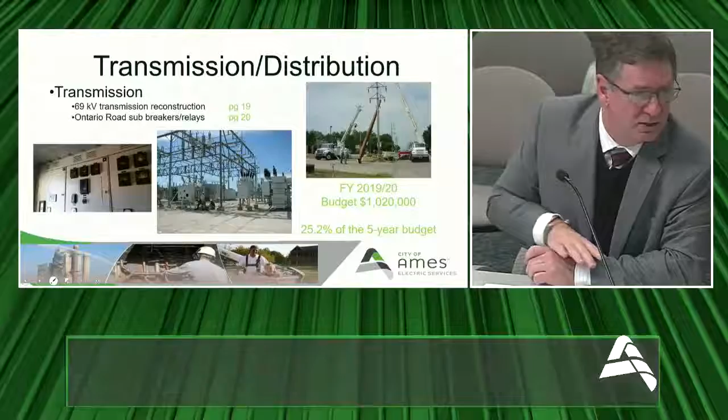The numbers on the lower right show that in fiscal year 2019-2020, from a transmission and distribution standpoint, we're only spending about $1 million. But looking at the overall 5-year budget, it looks like we're spending about 25% of our capital budget on transmission and distribution, which means the remaining 75% is going to be spent on the power plant.

From a power plant standpoint, we basically have 4 units. We have 2 peaking units, called gas turbines or combustion turbines. Combustion turbine 1 is our older unit, put in in the 60s. The communication equipment between the main power plant and that unit is fairly outdated, so we have a project to basically replace the remote terminal unit, the meters, and the relaying and things like that.

Before we get to power plant, the other half of the transmission side is we do have projects where we're continuing as a capital project to replace LED streetlights. This is a 5-year project, and we still have a few more years to go. By the end of this year, we'll be at about 55% changed out.

The approach we took, rather than spend a lot of money in year 1 and bring in crews to change everything out, is that anytime we touch a light, whether changing out a pole, the light bulb itself, or the masthead or anything, we automatically put up an LED. That way we're maximizing the use of our maintenance time, but it's taking us longer to get changed out. Once the CIP is done, all future LED changeouts and installations will be done under our operation and maintenance. We should be concluded by the 21-22 timeframe.

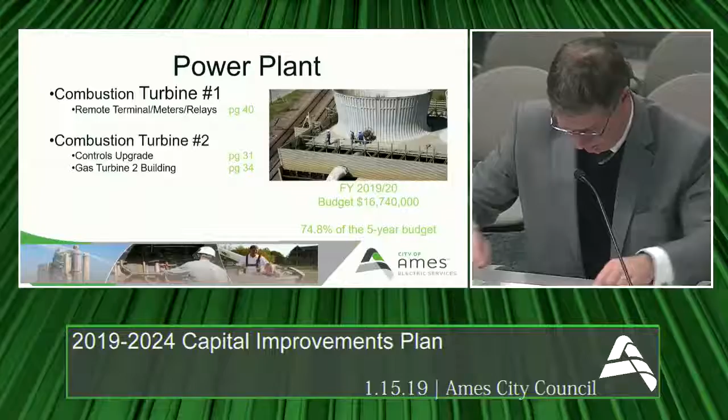Question, Don. On the combustion turbines, how often are those used in a typical year? Typically we will run a combustion turbine for two reasons. One, for price — these things cost about $250 a megawatt hour to run, compared to our unit down on Main Street, which is about $38 to run. We haven't been seeing prices that would drive that. The second reason we would run it is for reliability. If we had a power line go down or anything like that, these units would be the things that come on, and they start very, very quickly, so we have reliable power to our customers and could have them online in under a half hour.

So I understand that's why they're there, but in practice, how often have they been used? Under 100 hours a year. Thank you. And Steve was mentioning to me that they're also used at time of peak. Again, that's a price thing, but when we're typically peaking, which is in the summer season, there are times when we would like to have generation online here. Again, from a reliability standpoint, we're not importing stuff, we have the capability to cover all of our loads here if we want to.

One of our two baseload units, Unit 7, we have several projects going on there, and many of these have been in past CIPs. We've delayed some by a year or two because our primary need for both units is boiler tube work. Mr. Schainker mentioned in his budget highlights how we've shifted things that were less critical than boiler tubes, and this is one of those projects we delayed a year so we can spend our resources on boiler tubes.

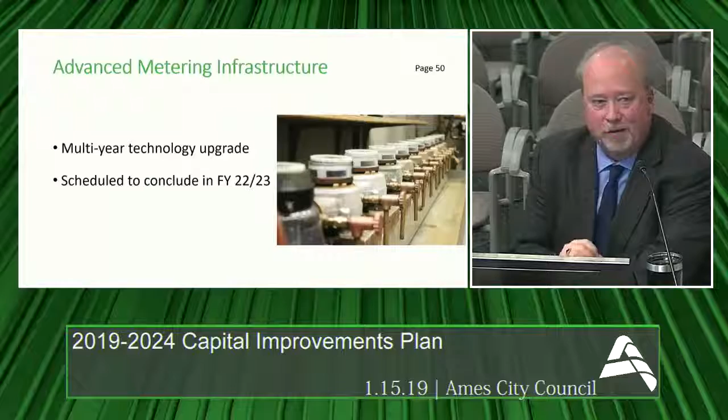Page 51 is a collection of smaller projects that don't warrant their own standalone page. We call it a facility improvements project. In the first year, there is money set aside for plant control, the SCADA systems, and the plant security systems, in anticipation that after living there for 2 years we'd find a couple things that needed to be tweaked in how those systems operated.

We're also including money for a distributed antenna system that will go into the facility to transmit cell phone signals and public safety radio capacity down into the interior of the facility, for employee safety, emergency response safety, and so maintenance staff working in the basement can get a phone signal out to contact a vendor if needed.

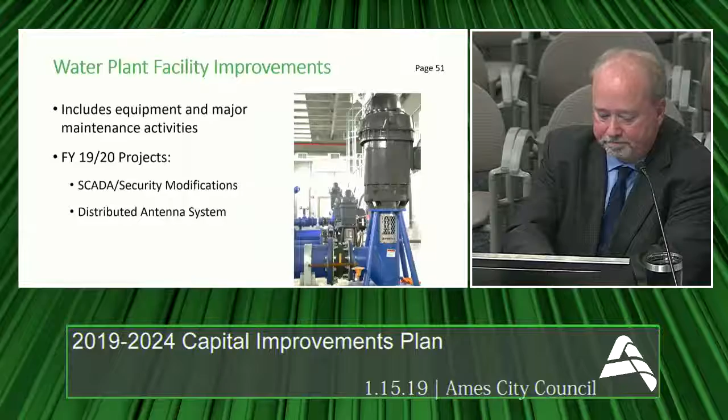Page 52 is the demolition of the old water treatment plant. We are going to remove the treatment structures there, not the 2-story technical services complex, which is home to the water meter division and laboratory services division. That building is going to remain. The one change from what you saw last year is we now show the expenses split over 2 years, anticipating the work won't all occur in one fiscal year.

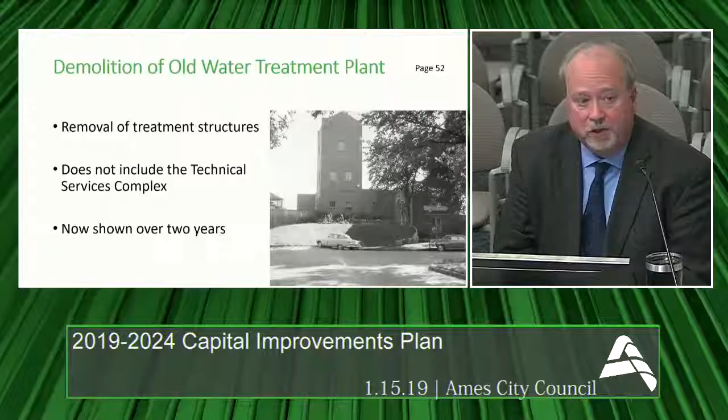What will you do with the space when those are removed? Our intent for now is just to return it to green space. There's no immediate plans for the site. We made a commitment to the neighbors early on that we weren't going to let the site just sit there and deteriorate and become an eyesore and a hazard. We want to get it taken down as quickly as we can.

For the building that's going to remain after demolition, is there anything special about its construction, or is it just a perfectly good building we might as well use? Yeah, it's about 25 years old and still in really good shape. There was just no reason to spend the money to move or replace that facility. I like this picture, it's about a 1950s vintage shot of it. Yeah, that's from when Fifth Street still went past the facility there.

Do your construction costs include any modifications to the structure that remains, in terms of exterior wall construction modifications, that kind of parking stuff? Yeah, it also includes some active utility piping that still goes through the old facility that we'll have to make some adjustments to as well.

Page 53 is a wellhead rehabilitation project. You saw this last year. The difference is we're adding another 50,000 in the first year of the CIP so we can do some antenna replacements. We've had some issues with intermittent communication failures, and working with some specialized vendors, it seems like now's the time, while we're doing controls work on the wells, that we should go ahead and update the antennas as well. So we've added a little money in the first year to do that.

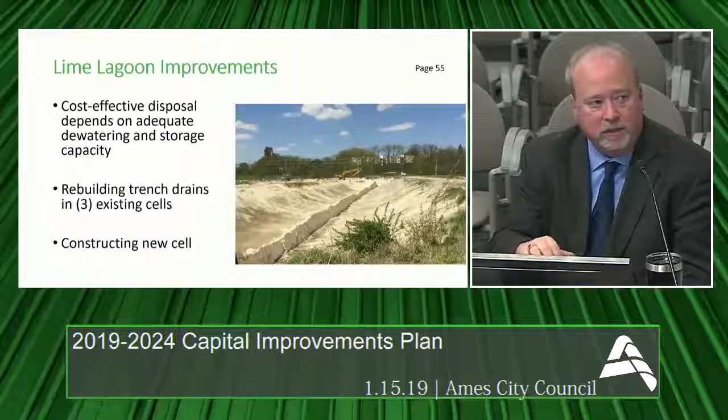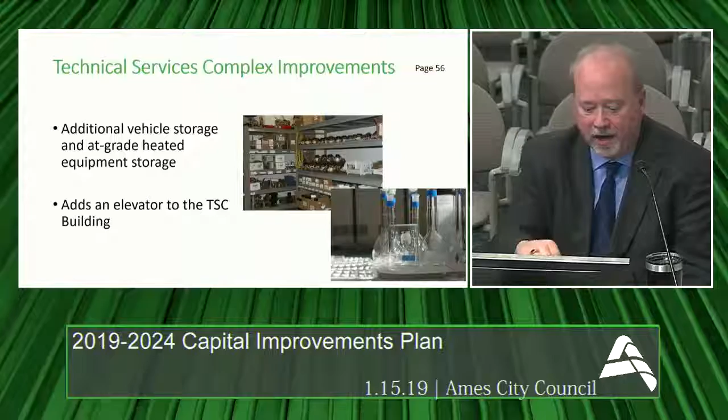Page 56 is some improvements to the technical services complex, that two-story building. Once the water plant comes down in the space immediately adjacent to the TSC, we're looking to add some vehicle storage, some at-grade heated storage for the laboratory division, and also adding an elevator onto that building. As long as the water plant's there, there was a ramp you could drive up to get to the second floor. That option will go away as the plant comes down.

Page 57 will be an extension of the plant control system out into the distribution system. It'll give us a better, more in-depth look at what's actually happening in real time in the distribution system. It'll allow us to track some limited water quality parameters. The big thing is really going to be tracking pressure, that's one of the main things we're wanting to get.

Systems are becoming intelligent enough that now if a main break happens and there's a pressure wave that goes out in the distribution system, by triangulating between multiple sensors, it can help us narrow into where the main break was. That'll hopefully allow us to get earlier notification, quicker responses out. And if a boil water advisory is needed because of a main break, it gives us the data to delineate exactly where that area is, so that everybody who needs to be advised is, and people who don't need that disruption don't unnecessarily get included in the boil water advisory.

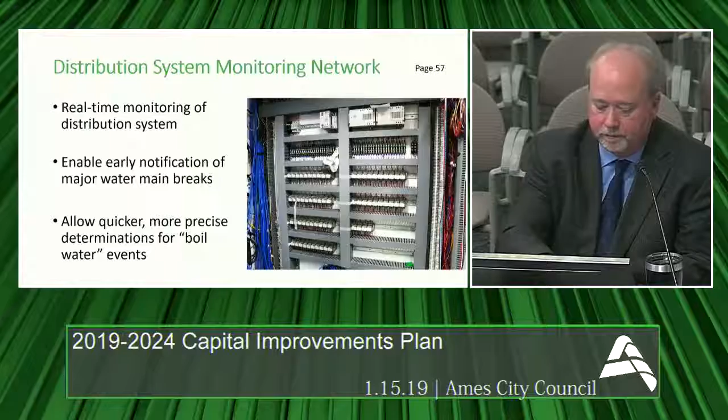Page 58 is some placeholder money for an elevated tank in the East Industrial Park. We know that at some point we are going to need a tank there to manage pressures and provide fire flows. The timing, however, is what we don't know. It's really going to depend on the type of development and where it happens first. If it happens more on the west side, closer to existing infrastructure, we may not need an elevated tank. But if we get an industry way out on the east edge, particularly one with firefighting concerns, then we'll probably have to move quicker.

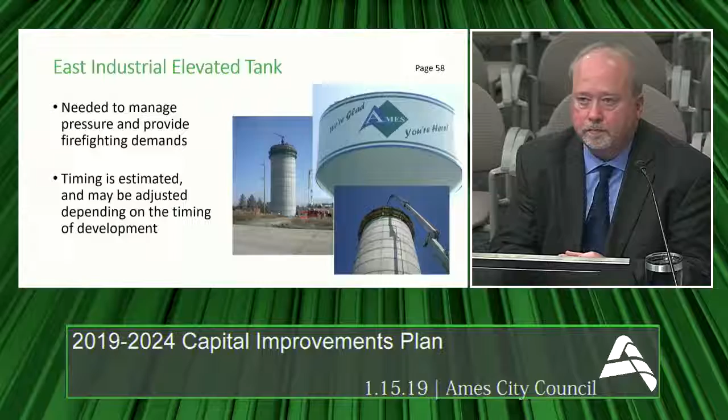So we've talked before about the types of industries that might locate out there and the amount of water they would use and how that would affect plant capacity.

This is long down the road, but is there any chance we'd have even more expansion out there that would require a 1.5 million gallon tank or 2 million gallon, just thinking that sometimes the base cost is about the same, you just get a bigger tank. How do you arrive at the 1 million gallon tank to come up with what's best to serve that area and provide for the needs?

A 1 million gallon tank is really kind of an industry standard, and it's based really on the fire flow volume more than the water demand by the industry itself. So that's really what would drive it. Now, if we were to have an industry with some sort of exceptional firefighting demand, that may cause us to rethink it. But when you get to larger tanks, you start getting issues being able to turn the water volume over to keep a chlorine residual in the water. So there's a line we try to walk there as well.

What's interesting is that the size of the tank doesn't really matter — it's really the pressure in the water lines versus the capacity versus drawing the water out of the tank, is that correct? Right. The elevation of the water is what drives the pressure, not how much water is up there. Whether it's 1 million gallons or 2 million gallons, it's the elevation of the water that's going to drive the pressure.

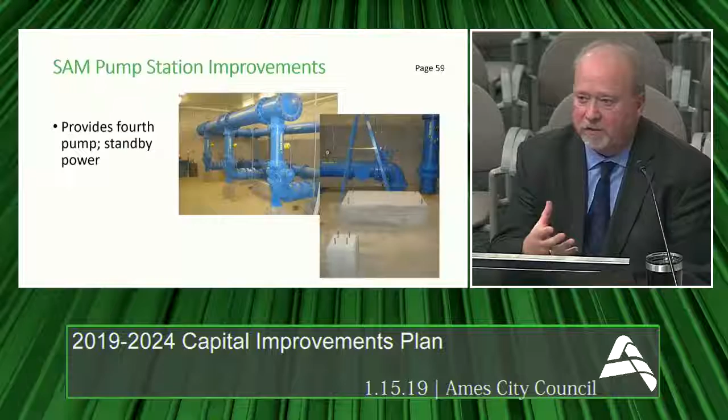Page 59 is some improvements to the pump station located at State and Mortensen, right at the base of that water tower. When that tank was constructed, it was built to accommodate 4 pumps, but only 3 were initially installed because there wasn't enough demand in that west pressure zone. As we track the growth in hours per day or week that we have pumps doubled up in that pump station, it looks like it's time to start planning to add the 4th pump that was ultimately envisioned to go there.

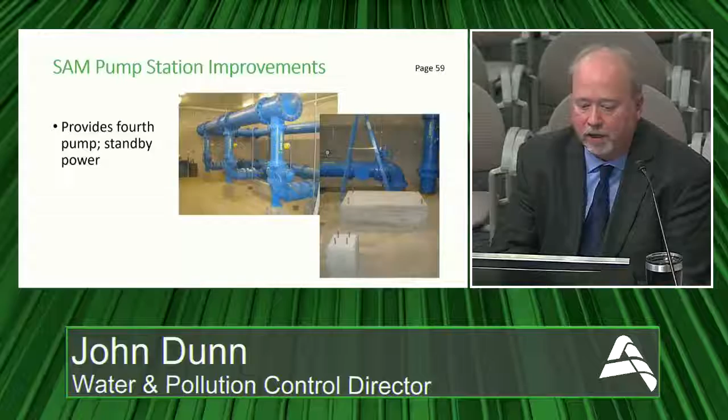And that's it for the drinking water side. So I'll keep moving straight ahead into the water pollution control facility. The first project there is on page 61. Again, this is kind of an assortment of smaller projects. You can see, for example, a grit bin in the first year, and also the construction of a new sampling station at the raw water pump station, which is what we have envisioned for the first year of the project.

Page 62 is what's going to become a multi-year renovation of the raw water pump station process equipment. Most of what's in this facility is still original. It's 29 plus years old now, and we're starting to see that it's really showing its age. So we are proposing a multi-year project to completely renovate it, so that the money is spread over a couple of years. You don't see it all in this 5 years because there's another year, essentially year 6, where construction of these modifications would complete.

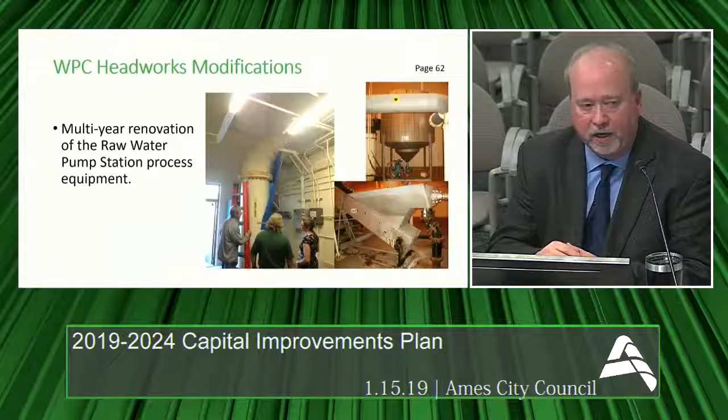Page 63 is our new project, the watershed-based nutrient reduction project. You might recall we talked about this in November when we were here in a workshop format. At that time, we had proposed $100,000 per year. Based on feedback we received from you, and also public comments suggesting that maybe more money should be dedicated to this purpose, we've now increased that to $200,000 per year. This would look at projects outside the water pollution control facility in the watershed, looking for projects that have a nutrient reduction function, but that also provide other ancillary benefits. Maybe it's providing recreational opportunities, maybe it's flood control, maybe it's drinking water source protection. But we're looking for opportunities where we can get as many of those other benefits in addition to nutrients, so that we maximize the bang for the buck.

We also hope that for a lot of the types of projects we would go after, there might be some grant eligibility, so that we can use our money as a local match and leverage that to get even bigger, more beneficial projects to come out of it.

Would those projects be limited to Story County, or how would you go about determining the location of those?

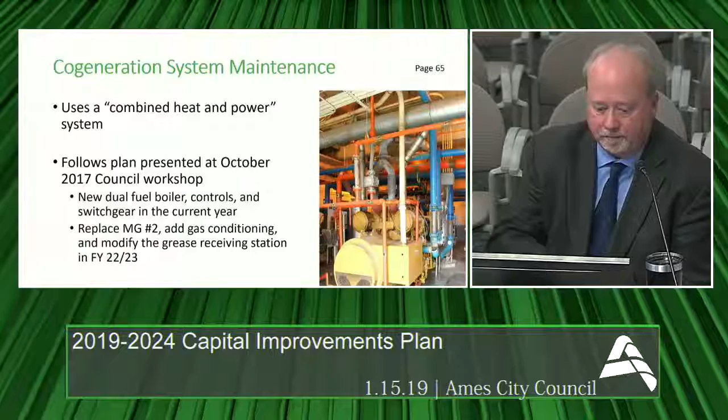Page 66 is the nutrient reduction modifications inside the treatment facility. The goal, as we explained back in November, is to try to meet the goals of the Iowa Nutrient Reduction Strategy over the course of 20 years, making modifications to the facility in 3 discrete phases spread over that time. That plan lets us maximize the remaining useful life of the infrastructure we've got while still continuing to make progress towards meeting those goals.

One of the other pluses that came out of this concept from our consultants at HDR is that by going at this in smaller discrete phases, it gives us a unique opportunity over the next 20 years to address capacity issues at the facility in smaller bites. Every time we do another phase, we can adjust the capacity as needed, so we don't have to sit here today and try to guess what the demand is going to be 20 years from now, or guess what's going to come in the East Industrial Park. We get a chance to take little bites at it, which is really a pretty unique thing for a facility like this to have that option.

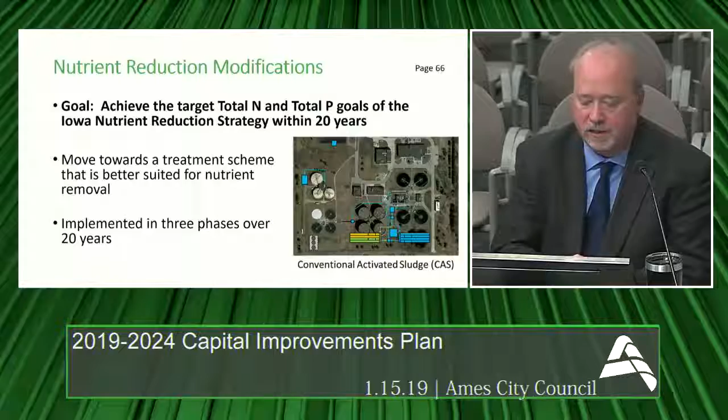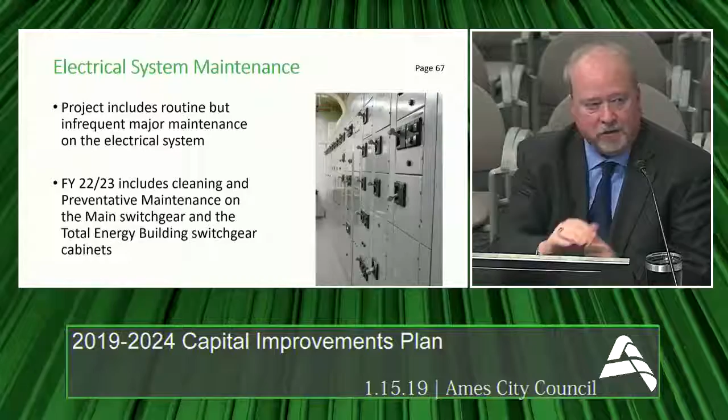Lastly, probably the least exciting project is the every 5-year routine maintenance of all the switchgear in the facility. We come in, hit them with infrared cameras, look for hot spots, failing insulation, loose connections, get them cleaned out, vacuum out the dust, clean out any cobwebs, just make sure that we're maximizing the life of the switchgear and also maximizing the life of our employees by making sure that equipment is as safe as it can possibly be. So that is our plan for the next 5 years. Any questions? I'd be glad to answer them.

Good job. All right, thank you.

Tim, do you have the same question for John as you do for Don in terms of safety? When I see all these antennas, I presume those are wireless antennas, is that correct? Yeah, we operate on a licensed radio frequency for communication with the wells.

I was thinking as you were posing that question to Don about what the same answer would be for us, and I think a lot of it is pretty similar. We have multiple firewalls that protect the control system from people getting in from the outside. Access control, the ability to get physically into the control room, is also a measure we have in place—you've got to get through locked doors before you can get in there. Outside the treatment portion of the facility, access is locked down to read only.

So for me, sitting in my office, I don't even have this capability yet, but it's coming in the very near future. I'll have read-only access so I can view the screens, but I can't start or stop pumps or do anything in our facility. And then as a last fail-safe, we do have the ability to completely unplug the facility and run it in a completely manual mode. It will be, I think, a little more difficult now with the new facility than it was at the old one, but we do still have that capability. We've had to do it a couple times when the control systems have gone down unexpectedly, and we've had to manage the plant in a purely manual mode.

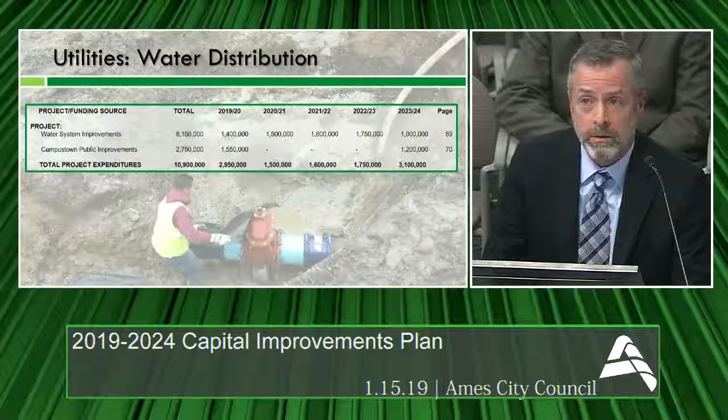So as we get started in the utilities program, we begin with water distribution. The water system improvements on page 69, that's our annual program that's generally focused on replacing the 4-inch water mains. We make every effort to coordinate that work with street work that's also programmed in the CIP.

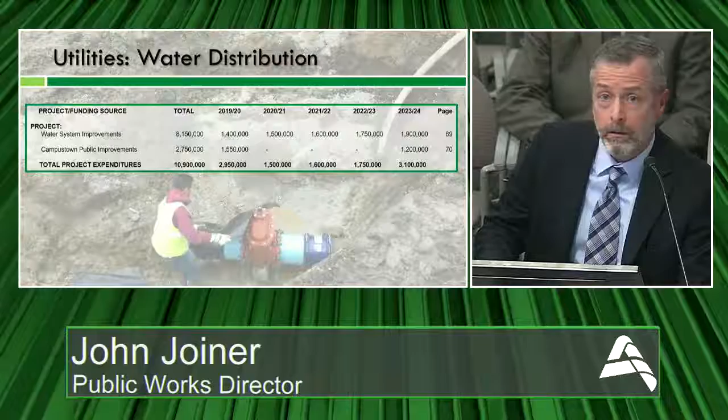Then next in utilities, we move into sanitary sewer. The Clear Water Diversion Program, that's an annual program that we have that installs collector lines that generally serve to collect sump pump discharge throughout the community. You'll see in the first year, we've doubled what is our typical annual budget for that. With all the rains that we received last summer, we got a number of requests and inquiries and comments. So we've doubled that budget for this coming year.

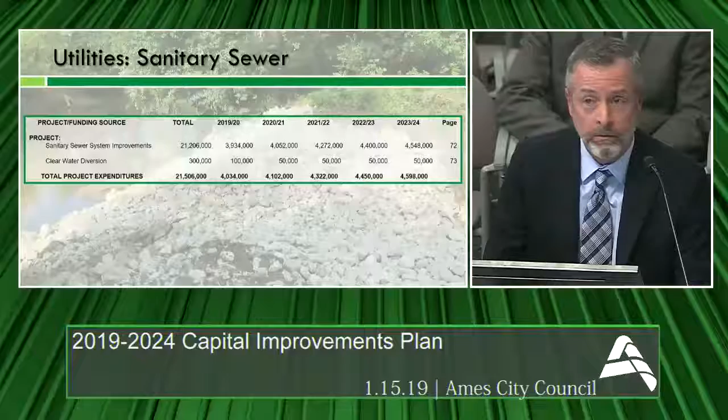In the second year, we've got our money programmed in anticipation of being successful with the FEMA grant. So if we are to be successful with that, that money will be available in federal fiscal year 20. That wouldn't be until late fall next year, which is why we have that work programmed in our fiscal year 2021.

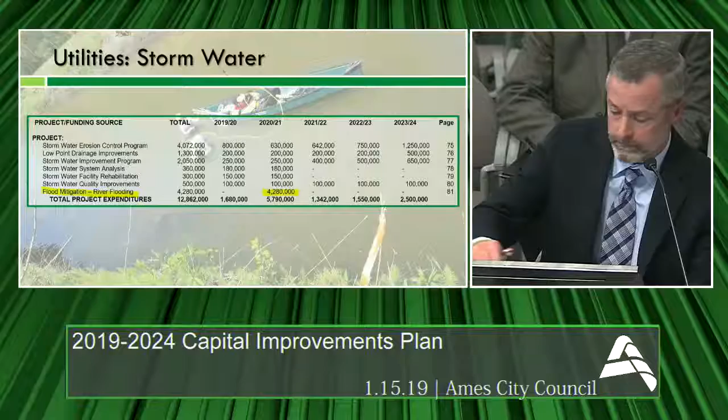Also under the stormwater program, we have our erosion control program. We'll be doing bank stabilization in the Brookside Park area at various locations.

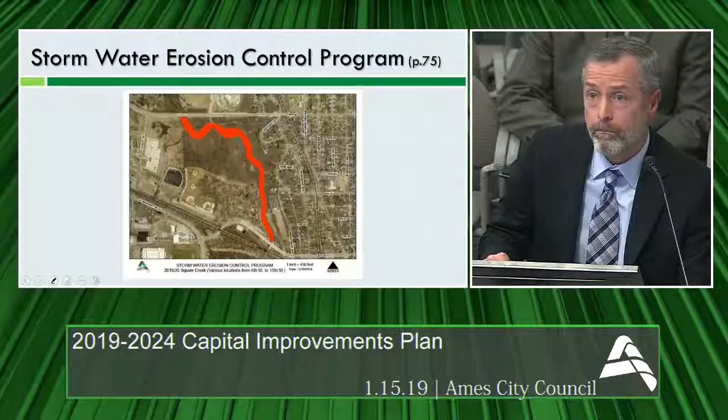Under our facility rehab program on page 79, this is the Bloomington Heights West Townhomes. A lot of times these developments, the broader area facilities, especially in the residential developments, are the city's long-term maintenance responsibilities. In industrial areas, especially, and sometimes commercial areas, the long-term maintenance responsibilities generally lie with the properties.

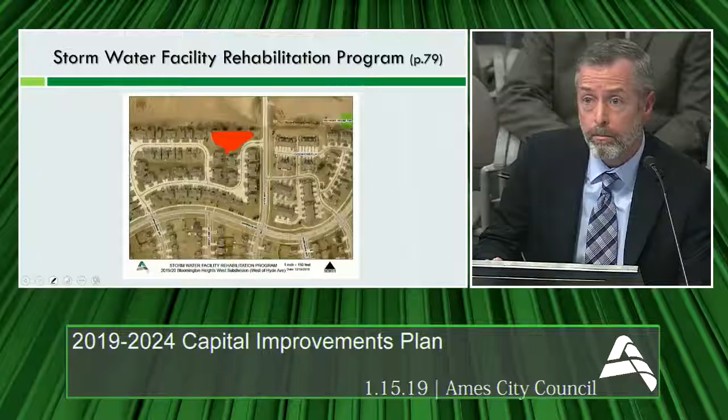Then closing out utilities, we have resource recovery. This is our annual kind of big ticket maintenance item program. So the staff works hard to keep the plant in top running shape and forecasting out what the needs are, the maintenance needs to keep it running as such.

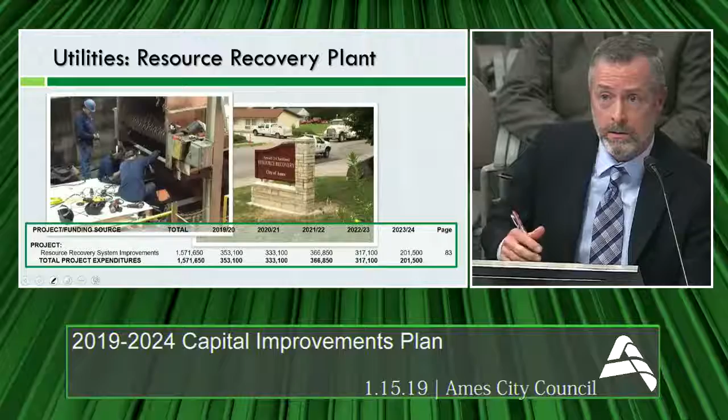Then we move into the transportation program and we begin with streets engineering. One that I wanted to point out is the ISU Research Park.

As you know, we were successful and received our Economic Development Administration grant for this project in the fall, and last week at the DOT Commission meeting we were awarded the RISE grant for that. Council also saw that application and approved it last week. So in one of the next few meetings, we'll be receiving the official grant back from DOT and bringing that back to council for official acceptance.

Also, we have a couple of programs that we're just accomplishing at various locations. One is the concrete pavement improvements, and another is our right-of-way restoration program.

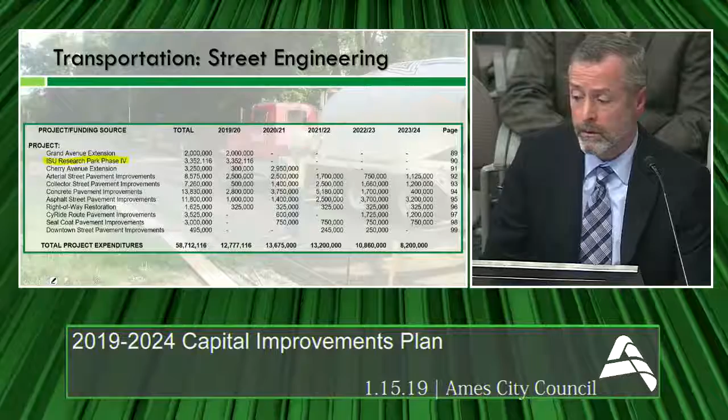Then, of course, Grand Avenue is a project that's been at the top of the CIP for the last few years, so on page 89 you'll continue to see that program. We're continuing to work out the arrangements for land acquisition and are hopeful that will be moving forward in a cooperative manner this spring. You can see on the right-hand side some renderings of what that roadway will look like after completion.

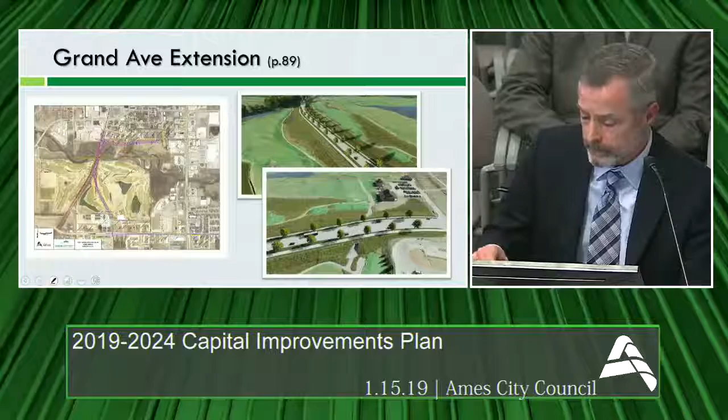John, on page 89, our page 89 just shows $2 million this year for— Oh, that's right, I'm sorry, I was looking at 18-19. I was getting confused.

Okay, yeah. This is a new connection project that's been in the CIP for several years, finally moving up into the first year in '19-'20, with preliminary engineering, environmental analysis, and land acquisition for the Cherry Avenue extension, and then the connections with Southeast 3rd and Southeast 5th.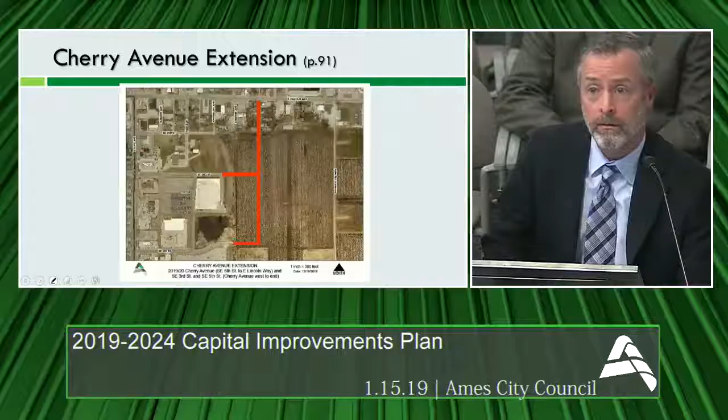Page 92 is our arterial street improvement program. The program in '19-'20 is proposed to be 13th Street, from Wilson to Duff. This work will be coordinated with other work we're doing in the area, namely the crossing enhancements at Clark and 13th, as well as drainage improvements and asphalt street improvements north of Fire Station 1.

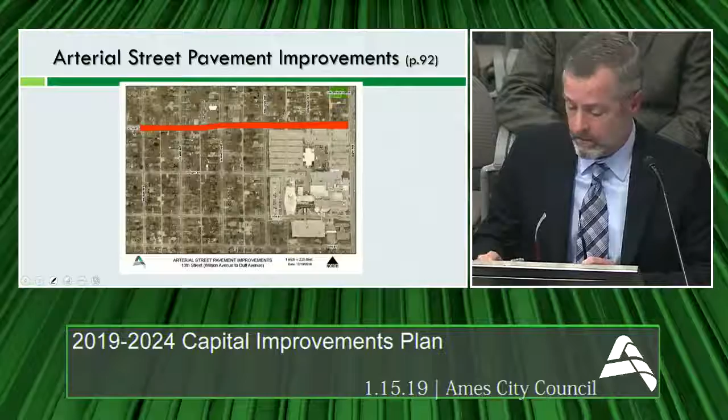Page 93 is our Collector Street improvements. '19-'20 is proposed to be Bloomington Road, the divided boulevard section with a wide grassed median, between Hoover and Grand.

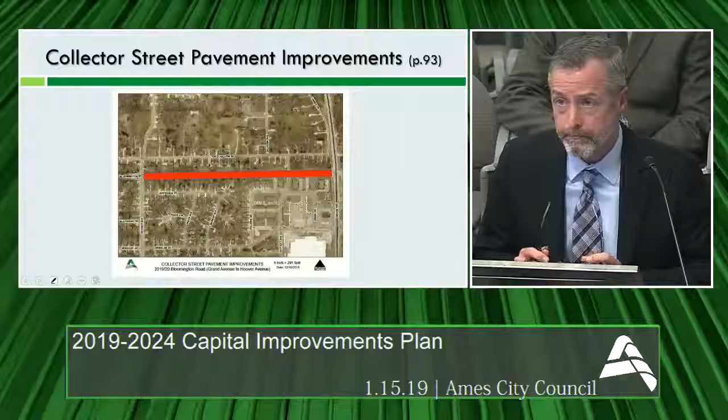Page 95 is asphalt street improvements. This is one of the projects I just alluded to that's being coordinated with 13th Street. We'll be doing improvements north of Fire Station 1 on 14th and 15th Streets.

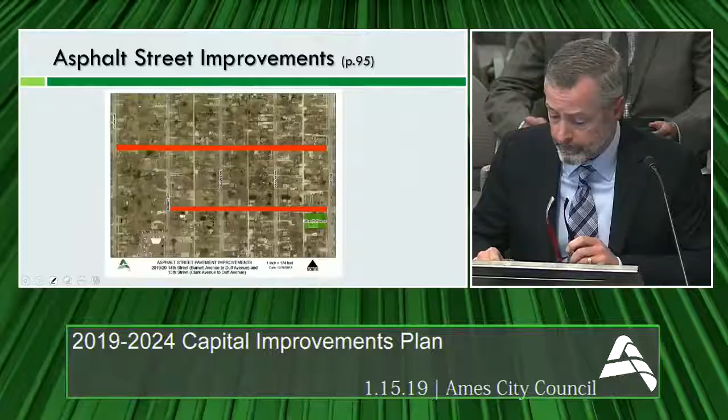Next in transportation we have shared use paths. Our multimodal roadway improvements will include intersection safety enhancements. One I had mentioned that's being coordinated is our 13th Street and Clark. Another intersection improvement we'll be making is at South Dakota and Mortensen, to make it easier for bikes and pedestrians to cross those busy streets.

Sorry, Jack, can you go back to 95 just for a second? The asphalt street on Oakwood Road, that's pretty narrow. There's not much of a shoulder and you have quite a bit of ditches. Is there any widening going on there at all, or is it just going to be basically replacing the street? Because the street is obviously deteriorating on Oakwood Road, from State to University.

With that being that far out, we haven't done any preliminary planning, but that would be one thing we'd have to consider—the roadway standards for safety. So we'll be considering lane width, shoulder width, or curb and gutter. Those types of things will be taken into account with our preliminary design.

It's not too bad on the south side, but on the north side you go pretty near the shoulder and then it just drops off into a ditch. I was just curious, if you had some kind of an accident, or ice, you could have cars going into ditches—I was wondering if that was part of it. Sure, you bet. There'll be clear zone standards that we'll need to meet.

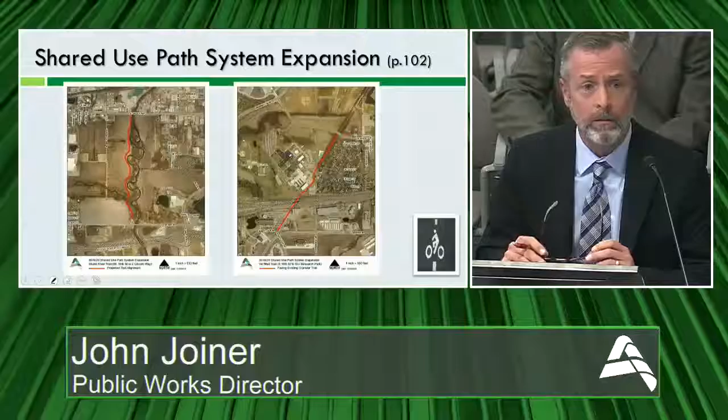This sheet is a summary of our shared use path, bike, and pedestrian improvements, both standalone and associated with other street projects. A couple years ago, council mandated that over the 5-year CIP period we average 1.2 million per year on these types of improvements. Over this CIP, we're averaging just over 1.7 million per year. This sheet summarizes where all those improvements can be found.

Moving into traffic engineering, I want to point out the US 69 improvements. The first year will be our share of a DOT maintenance project on Lincoln Way. Lincoln Way from Duff to Grand is US 69. The DOT will be administering that project, and this is our portion of the improvements being made along with it. Then in 2021, we'll be looking at aligning the eastbound off-ramp from 30 to South Duff with Billy Sunday Road and signalizing that intersection.

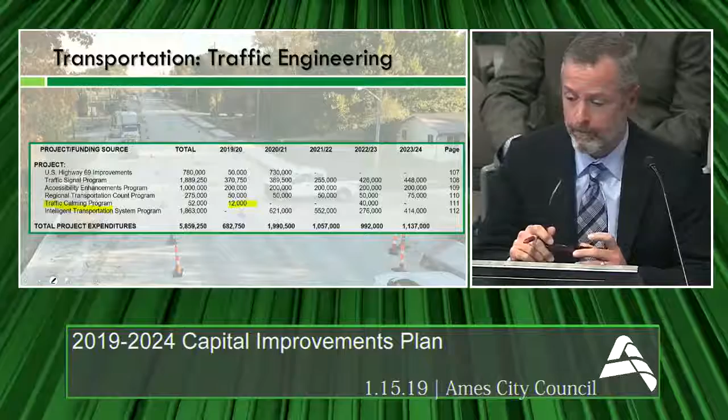I think you can make do with that a few more years.

So a project we're looking forward to - we got an email, and Damien responded to that, on South 16th and Dayton Road. Is that just all control, just programming, Damien, in terms of the complaint about a huge backup from 5 to 5:30 at that intersection? Does that require any capital improvement, or is it just reprogramming? We're doing a quick study of it, and if there's anything that would require capital improvements that we couldn't adjust with just timing or maybe changing a head or two, we'll have to bring that back at a future CIP.

So that is unknown right now. Yeah.

Next in transportation, we have street maintenance. Our bridge rehab locations for the 1920 year will be 6th Street over the railroad and Minnesota Avenue over the railroad. We'll be doing deck improvements there.

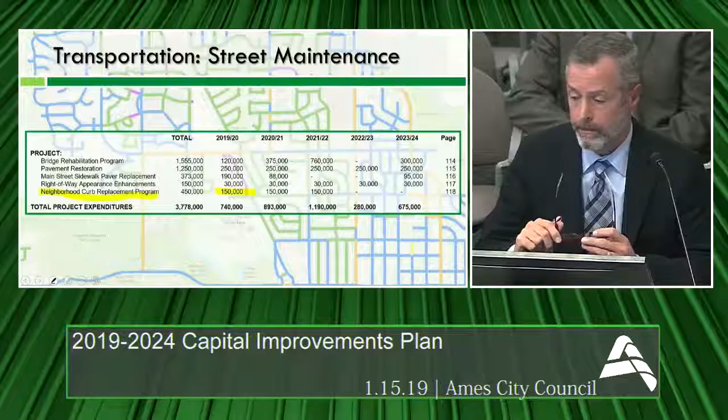That's great. John, are those brick intersection markers with the stone caps under your responsibility too? Some of those are really starting to show salt damage and deterioration. They are, yeah. Our operations folks have been coordinating with Parks and Rec to see what we can do on that. We started looking at it last year, talked to local vendors about some things that might be done, and we'll see what we can accomplish through the operating budget. Anything larger we'd have to bring back in a future CIP. We try to work together on these things rather than put it in a certain cubbyhole - everyone works together.

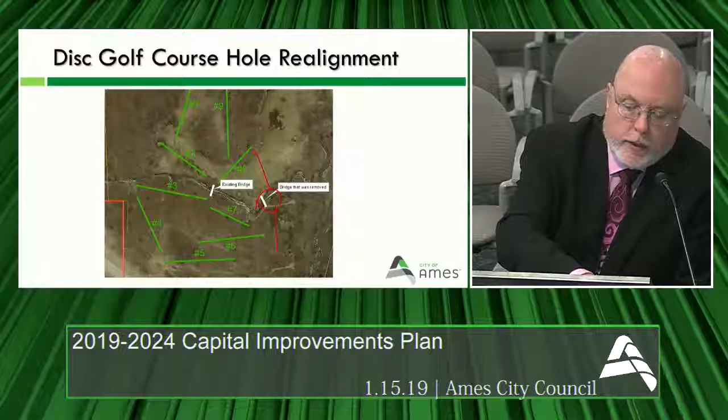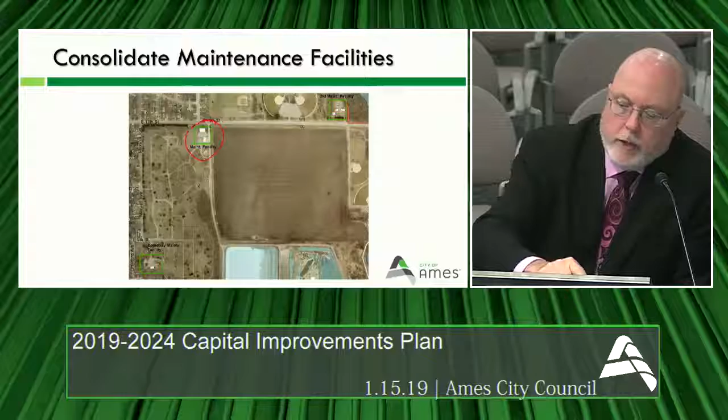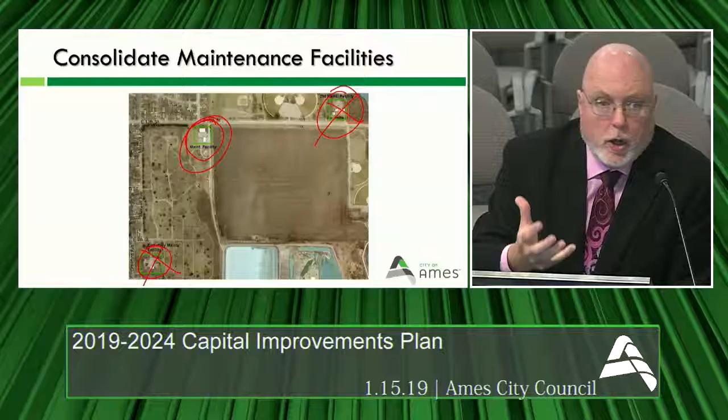Years 3 and 4, that shows some of those. One of the things in there is consolidate the maintenance facilities. So you see right now this is our main shop right here. We have the old shop right here, which is in the floodplain. And then we have the cemetery, where some of the buildings are getting to a point where they need to be replaced. So what we'd like to do is get rid of this and put everything at one place. It would be helpful for all of our staff to be together, all the equipment together, and so on. So that's what this one is for.

River Valley Park, Cottonwood Shelter, there's a couple of things regarding this. You can see the Lowhead Dam project. We feel this is going to be a very popular destination, not only for Ames residents but outside the area. So we've got a couple things we'd like to do, actually redo the parking here somewhere. But what we want to do then is put a shelter on the other side of the parking, because eventually in a long range plan we've had discussions with the maintenance facility gone, we'd actually maybe bring a road through there and have another entrance to River Valley.

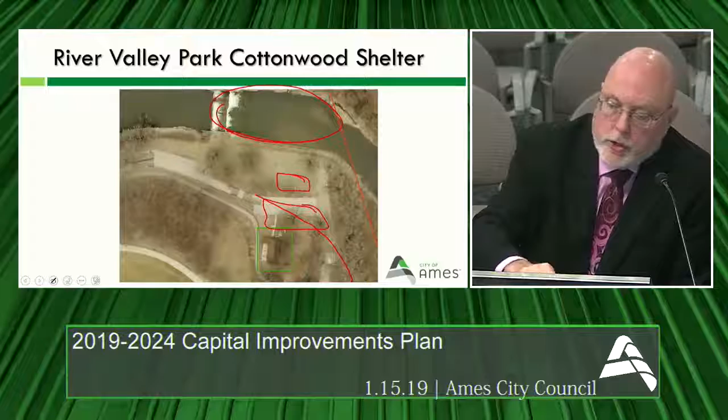So where we come in from the old shop, because right now anytime you go into River Valley you have to turn around and go back out. There is no drive through in there. So that's some of the things we'd like to do with that area.

And then year 5 is just a few other items there. Playground equipment - what we did, you'll see in all 5 years, a number of different playground pieces. We really took Joshua Thompson, our Parks and Facilities Superintendent, looked at all of our playground equipment, put together a really nice chart with when it needs to be replaced, what we need to do with it. We've been going with the concrete borders around, which has been really nice. Accessibility is a lot better.

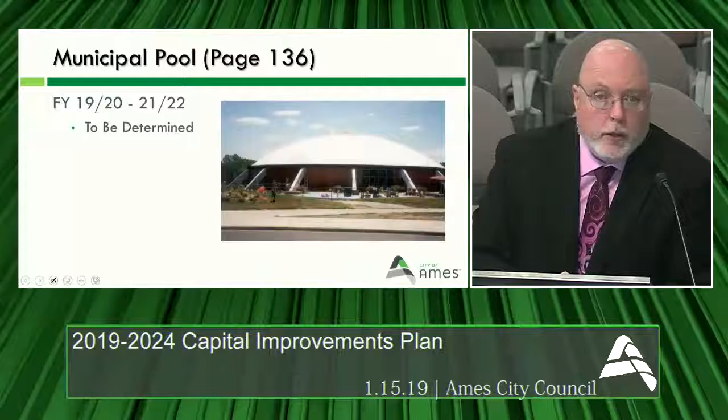Municipal pool, we just, again, $25,000 per year. School district does the same, to do anything. Right now we're extending that through fiscal year 21, 22.

ADA transition plan, working with Tashik to get the inventory assessment RFP out. That should be going out very soon. Then we'll develop a transition plan and address any compliance issues that we have. Now we put a water fountain and a grill here, but there's a lot of other things associated: doorways, height of sinks, all that kind of stuff. They'll come in and tell us what we need to do.

Ames ISU Ice Arena, that parking lot is coming up on 20 years, and it's getting to a point where we need to do some work on that. So we'll redo it and hopefully get another 20 years out of it.

Homewood Golf Course, part of the golf course clubhouse. We'll need to do some shared use paths, either along Duff or 20th Street, and we're having some conversation that will come before you another time regarding whether we need to do 20th Street or just Duff Avenue. We do need to do a sidewalk from the clubhouse out to 20th Street. There already is a sidewalk on the south side of 20th Street, but there's some money in there for that, and then we'll replace the bridge on hole number 9.

This next slide is the first public viewing of this. Right now we're working on the clubhouse design. This is kind of what we're looking at, putting it back in the same location. So we'll have to demo the current building and put this in its place, not only a clubhouse but also a community room and things.

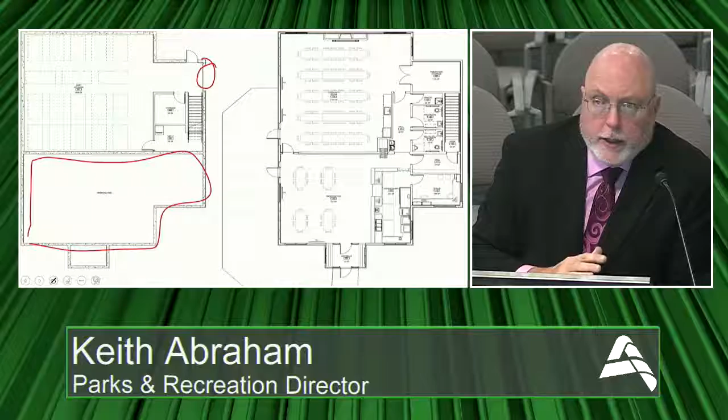That's what we have right now, but what we want to do is increase the number of carts we have, so we can maybe have some afternoon outings with maybe a business coming in. When they come in, they want to do something like this. Most of the golfers, if not all the golfers, get on carts so they can get through it quickly and so on.

But the picture on the right shows you the first floor. We have a little vestibule walking into the building, and then this area right here would be the counter, the concession, some seating, kind of for the golf, mainly for the golf piece.

This right here will actually be kind of an accordion wall that we have back here. So what we can do is this larger area with a fireplace up there, that would be the community room.

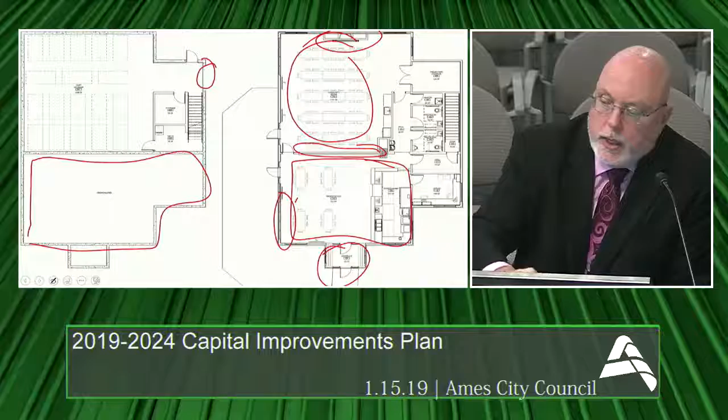So we can close off that community room, and if we have golf going on, we could still rent it out. Somebody wants to have a meeting, council wants to have their retreat out here, it'd be a good setting. We have a number of windows in this area, two doors out to the patio, and so on. This back here is office, restrooms, and then storage for tables.

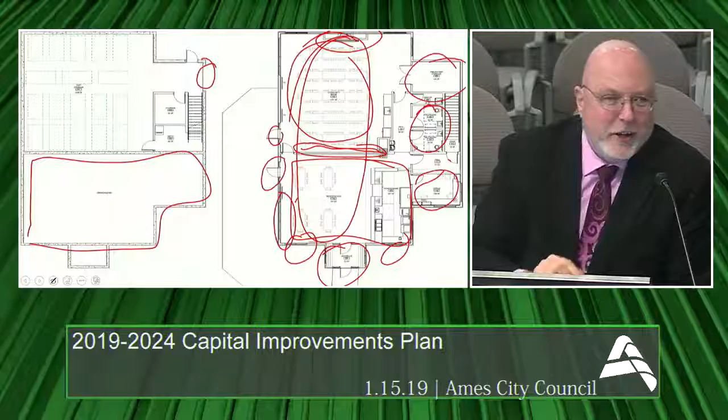But the whole idea is that in the wintertime it would be a year-round facility. In the wintertime we can open this up, so then this becomes one large room for maybe somebody wants to have a larger activity or something. So that's, like I said, the first public showing of what the clubhouse will look like.

Keith, what accounts for the increased estimate of cost on this? Yeah, so if you've been around on council, we started off the first time we had this in the CIP, I think we had $300,000. Then we raised it to $500,000. Then we went to $750,000, and now going through this with just the cost of materials, what our architect is estimating is it's just over $1 million for the thing.

Now we can skimp, we could do things differently, but we started off with a 3,500 square foot building. We're down to about 3,200, just under 3,200 square feet. It's one of those things that if we're going to do this, we wanted to do it right.

So based on the initial cost estimate from our architect, that's where you see on the page we asked for another $250,000 from the general fund of 17-18, those extra funds. So I really can't pinpoint one specific thing. We are looking at doing geothermal in this building versus just a traditional gas-fired furnace and so on. That was about $30,000, a little over $30,000 to do the geothermal instead, but we think that's a much better way to go than the traditional furnace. And we're still looking at different things, siding, maybe materials and so on, that we could get that cost down.

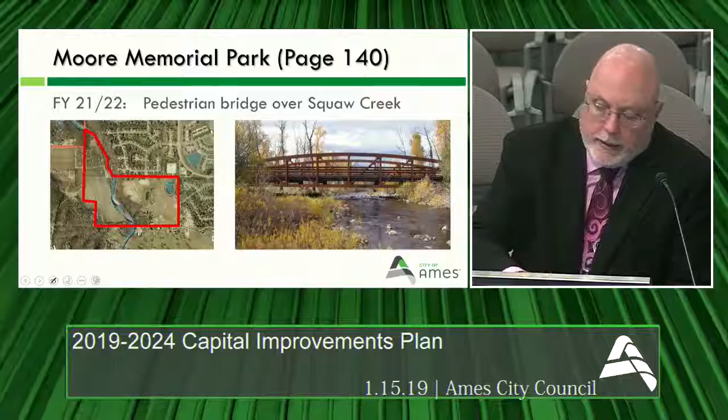Then Moore Memorial Park, the pedestrian bridge over Squaw Creek, still having conversations with ISU to be able to do that. And then having conversations with John Joiner and others in Public Works in regards to then making a trail connection all the way up to Ontario. So we delayed this a year and we'll just have to see how we move along in the other conversations or discussions.

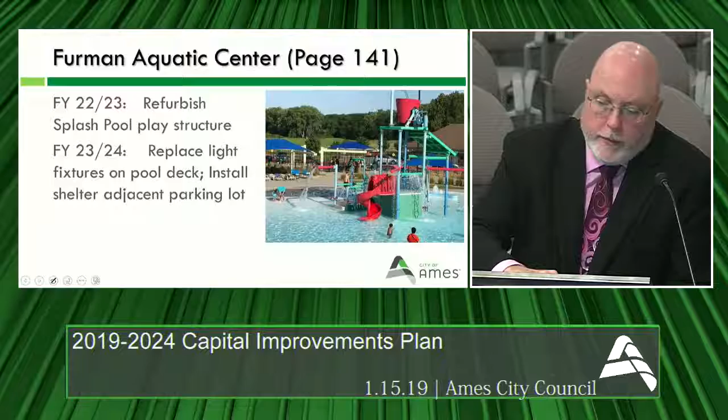So with this one, it's a play structure in the splash pool. We're looking at refurbishing that. It just gets worn out, especially the plastic. Some things might get replaced, some might just get a new coating on them. And then we have the light fixtures on the pool deck and then a shelter adjacent to the parking lot.